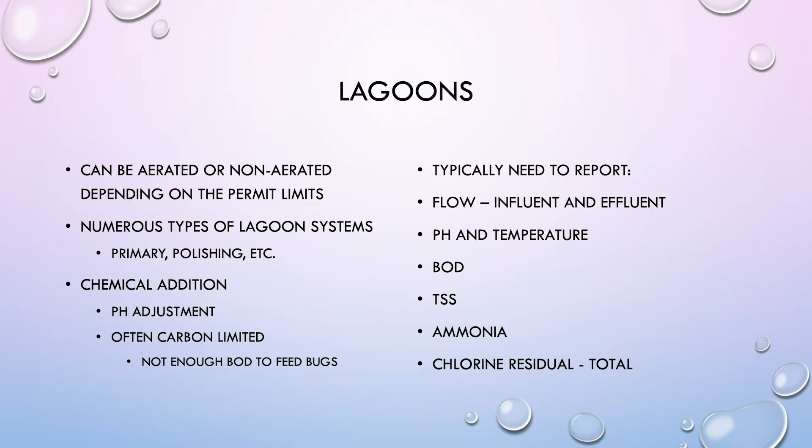Sewage flows from the collection system into the lagoon, usually BOD and TSS removal, right? We're going to aerate that sewage and let the TSS drop out. That's pretty much the basics of a lagoon. We've got algae, and the byproduct of photosynthesis is oxygen. Wind and rain produce that oxygen. Wind currents make waves, make DO. BOD removed by the oxygen, TSS removed by detention time. You guys are familiar with detention time because you're doing calculations in the lab, right? Bugs in the sludge reduce waste further.

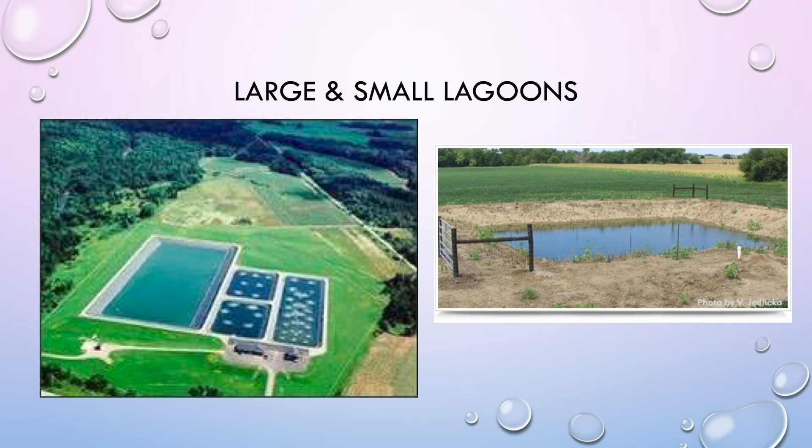Okay, we got little lagoons and big lagoons, right? So this is not my picture, but we have a lagoon in the state of Colorado that has a pre-treatment program that's very similar to the size of that. It's a campground that actually has a sewer line that runs to a manufacturer. So trying to do your local limits evaluation on that is rough. Big lagoons, that's South Dakota. That's a plant in Aberdeen.

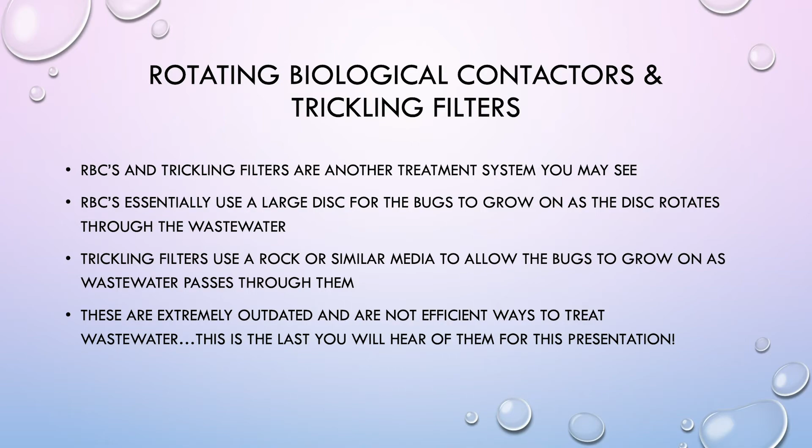Okay, rotating biological contactors and trickling filters, super old school technology. Has anybody ever heard of a rotating biological contactor? How do they work? It's kind of like a trickling filter on a stick. Trickling filter on a stick, like a jalapeno on a stick. Right. Big ass wheel with media on the side of it, goes into the sewage, comes back out into the air, the bugs create a slime on it, you get some reduction of ammonia and nitrate. RBCs are old. We don't really use them anymore.

Is anybody from Longmont? Nope. Longmont has RBCs in the back room of their plant. They don't work anymore, but they're there for historical knowledge, I guess, but they're huge. They've got to be 15 foot tall, 20 foot diameter. They're just huge. And back in the day, that's what the city of Longmont used for wastewater treatment. That was their pre-treatment program. So at that time, they just wanted to nitrify.

Anybody know what nitrify means? No. Whoa, whoa, whoa. Nitrify, denitrify. Some of you know what I'm talking about. Some of you don't. I'm not busting chops, but raise your hand if you don't know what I'm talking about when I say nitrification.

Okay, a couple of you.

All right, so nitrification, denitrification, that's the basics of wastewater treatment. We'll get into it. So rotating biological contactors, the big disc that runs through the sewage. Trickling filters, basically think about a silo. I'm from back east, so everything's a silo. Big round tank full of rocks. And you spray sewage on the top of it. The sewage trickles through the rocks.

And who's ever been in a septic tank? You feel that slimy stuff on the side of the septic tank? That's your biology. That's your bugs. That's your stuff that's doing the work. All that stuff grows on these rocks. And as you trickle wastewater across the top of this tank full of rocks, as it runs through the rocks, the bugs are absorbing and eating certain food. Ammonia, nitrate, things of that nature. By the time it gets to the bottom, it's fairly clean water. It's a little bit better than a lagoon for treatment, but still super basic.

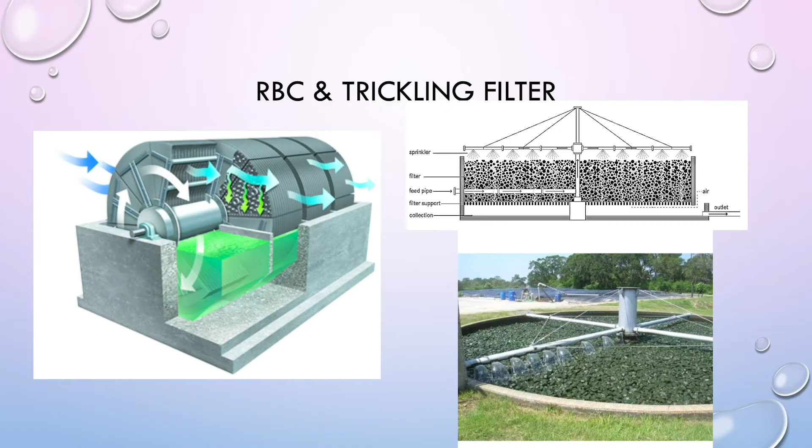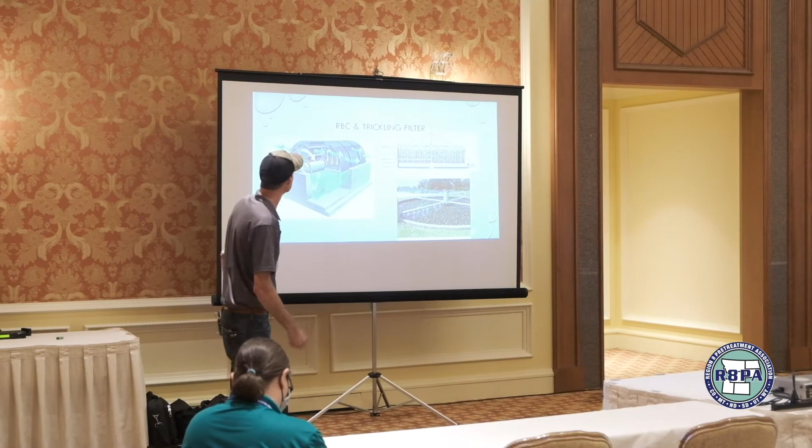So RBC, a couple of pictures here. If you can imagine the flow, the sewage runs through this big biological contactor, so basically a giant disc, cloth kind of feeling material. It runs really, really slow, like half a revolution per minute. Goes into the sewage, comes back out, there's a fan and air is blown across this thing for that nitrification, denitrification. Trickling filters, again, same thing, just a big tank full of rocks, the sewage sprays on the top of it, what comes out the bottom is somewhat cleaner water. Okay, that's the last thing you'll hear me talk about RBCs and trickling filters because we don't really use them anymore.

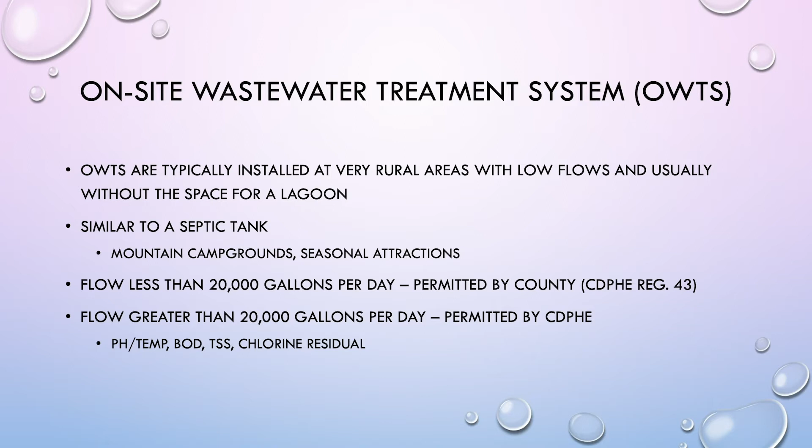On-site wastewater treatment plants. Anybody ever heard of it? I'm literally talking about a glorified septic tank. That's all it is. Very seasonal systems, campgrounds, they use these type of systems. So OWTS, on-site wastewater treatment. There's my acronym of the day. Rural areas, really low flows. Similar to a septic tank, mountain campground, seasonal attractions. Royal Gorge used to have one of these. I'm sure you guys have all heard of the Royal Gorge, highest suspension bridge in North America.

Maybe. Come on! All right. What? Oh man, you're talking my stuff now. We'll get into package plants. So let's just skip ahead here.

So flow less than 20,000 gallons per day usually, and permitted. I'm from Colorado, so you'll see a lot of stuff about Colorado. CDPHE is Colorado Department of Public Health and Environment. They're the ones that give our permits out. So these on-site wastewater plants, they're usually regulated on pH, temp, BOD, TSS, and chlorine residual.

So if you think about a lagoon or an RBC or anything like that, really small, campground type setting or a rural seasonal attraction, Buffalo Bill Museum, stuff like that, they're going to get these huge influx of flow, right? But somehow I've got to get my pH right all the time, I've got to drop some BOD and TSS, and then I've got to disinfect, so I've got to have a good chlorine residual. Very, very basic.

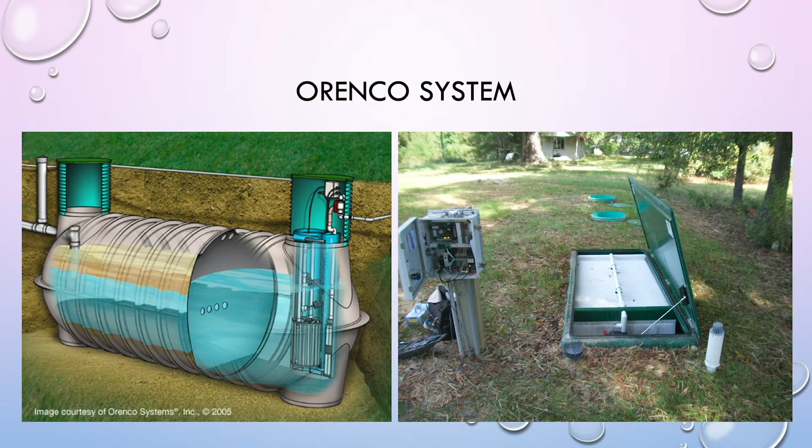This is an Orenco system. These are pretty common here in Colorado, so if you can imagine this house here, that's part of a campground, all the flow comes into this box, and inside this box we've got basically a grease interceptor, right? So the flow comes in, it's aerated, it's got these holes in the front of it, basically it only lets so much water through at a time, a little bit of a filter issue here, and then it gets pumped out into the receiving stream. Very, very, very basic.

Okay, now that we're done with the boring stuff, activated sludge. Who has heard the term activated sludge? Thank God. I don't know how many times I've walked in there like, you mean mixed liquor? I'm like, yes. So, activated sludge, this is the bugs. This is the biomass. This is the magic. So what is activated sludge? Substance used for removing pollutants from wastewater by a biological reaction that involves oxygen. The activated sludge is then separated from the treated wastewater and disposed of or returned to the process as needed.

That's from a book. What does that mean to you guys? For you folks that have never worked in a plant, what does that mean to you? Come on. Nothing, right? Doesn't mean anything. It means there's something going on. We're calling it activated sludge. It removes the pollutants from the biological reaction, and somehow there's oxygen involved. And then we take that activated sludge, we move it around the plant apparently, get rid of some of it, and we return some of it. Are you guys confused? Because I'm confused. That doesn't make any freaking sense whatsoever, unless you've been in a plant. So, pre-treatment folks, never been in a plant.

This is kind of cumbersome, right? It's like, what the hell is this guy talking about? Why is he at a pre-treatment conference talking about shit? Nobody cares. We always have to care, because if you're pre-treatment, you control the pollutants at the source, correct? You kill my bugs at the plant, we got problems. I'm coming to the pre-treatment office, knocking on the door. Hey, which one of you suckers let them dump a whole bunch of perc down the drain? Where's perc come from?

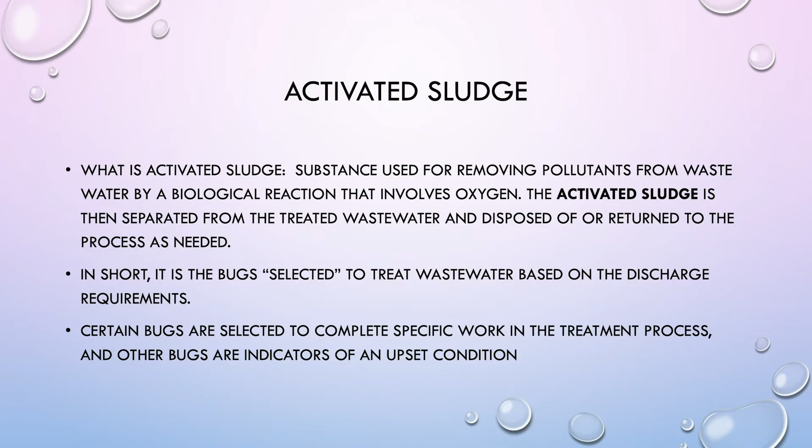Yes. All right. So my whole life in the plant side is making sure my bugs are happy. In the pre-treatment world, we're trying to make sure the industrial users aren't going to mess up my bugs, right? Anybody ever thought about it that way? Because most pre-treatment folks I talk to, they're like, I got to protect the clean water in the river that we discharge to. Well, there's a giant multi-million-dollar piece of equipment in the middle between where your work ends and the river. So if we screw up that environment, we kind of screwed up the entire environment, right?

In short, bugs are selected to treat wastewater based on the discharge requirements. So what that means, I don't know where a lot of you guys are from, because there's a lot of new faces here. Noah's from Box Elder Sanitation. I know Noah well. I used to work at Box Elder. I was a pre-treatment coordinator there. So at Noah's plant, at Box Elder, it's a complete biological nutrient removal process with no chemical addition. We have a little bit of industrial use in our service area. I have to select the bugs in my treatment plant to specifically do the work that is required for my permit with an industrial user contribution.

So I don't know if any of you guys have a BNR permit. We'll get into that in a little bit. But biological nutrient removal basically means you're putting out water from a wastewater plant that's probably going to go into somebody's drinking water plant. So if I didn't create an environment for my bugs to thrive to do certain work for Box Elder's plant correctly, they're not going to work to treat the waste. Now, can I take the Box Elder bugs and put them in Colorado Springs Utilities and they'll do the same work? Absolutely not.

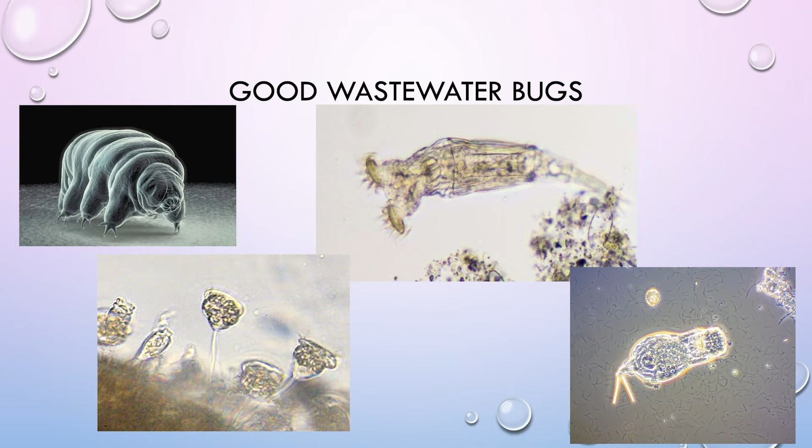Okay. So we've got good bugs and bad bugs. For example, does anybody know what this guy is? Water bear. What is a water bear an indicator of? High quality water, why? Well, because low TSS, great BOD, they're top of the food chain. How long does it take for a water bear to grow? I'm not sure. I think 30 days. Anybody know how long it takes a water bear to grow? Somebody said something. 9 days. Is it 90? 9 days.

To go from a bacteria to that guy. And when you look under a microscope, that dude is literally looking like a bear, cruising around. Sometimes you can hold up the slide and see him. So water bears are good bugs because it takes them 9 days. Does anybody know what MCRT is? Mean cell residence time.

Anybody not know what MCRT is? Don't be shy, it's all right. MCRT is mean cell residence time. How long is the bug in the system? How long is the bug floating around in my wastewater treatment plant?

Okay, somebody that knows what MCRT is. Somebody. What's your MCRT of your plant? Right now, probably hovering around 5.5. 5.5. 5.5 days for a bug to be in his plant. Okay? It takes 9 days for that guy to grow. So what happens if I throw a weird slug load at that plant?

That guy never grows. His MCRT is 5 days. That guy's barely making it to survive. You throw a weird slug load at it, that guy's dead immediately. Bacteria to dead, like that. So, we were talking, go ahead.

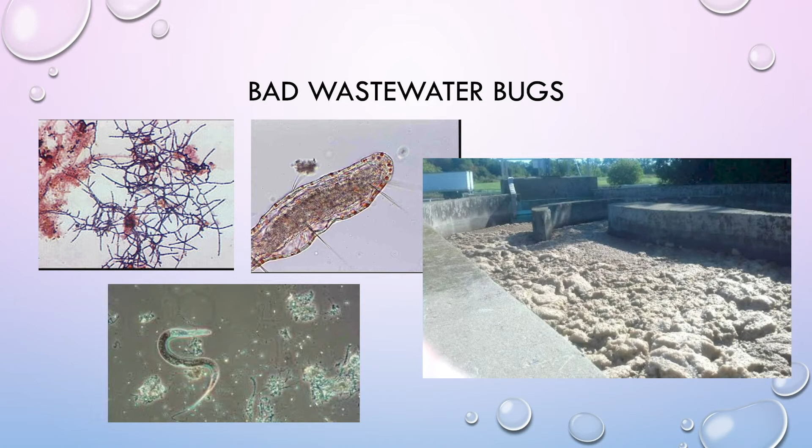Some people put chlorine in the system to try to kill them off, but I call that nuking them, because I don't know about you guys, but I don't know how to calculate the demand of waste-activated sludge running through a pipe at 200 gallons a minute. You kind of just drip it in there and hope for the best. Sometimes you kill the Nocardia, sometimes you kill the whole damn plant. So I'm not a fan of that.

But with Nocardia, the best thing to do to get rid of them is just figure out your process, figure out what's coming into your plant. And that's where you got to go. The plant operator guy has to go over to the pre-treatment folks and go, you guys see anything weird? I can't get my DO above 0.5. Now, as pre-treatment folks, you should be able to say, we've seen this happen, we've seen that happen, we noticed an odor this day, right? You got to work together.

Your collections guys, those guys are in the manholes. Kevin used to work in the collections department. Noah is in charge of the collections department. When I was working at Box Elder, how many times do you think he called me and said, dude, there's something stinky in this manhole? All the time. Something's weird. It doesn't smell like a manhole. Or we saw a weird color. That's how your pre-treatment folks should interact with your collections people. Your collections people are your first line of defense, right?

Your industrial users, you've permitted an industrial user. They had an illicit discharge. How long does it usually take them to get a hold of you? Within 24 hours, right? When they figure it out. Who's the first one to know something's wrong? What's that? Plant and collections. How many lift stations do you guys run? We all have a lift station, right?

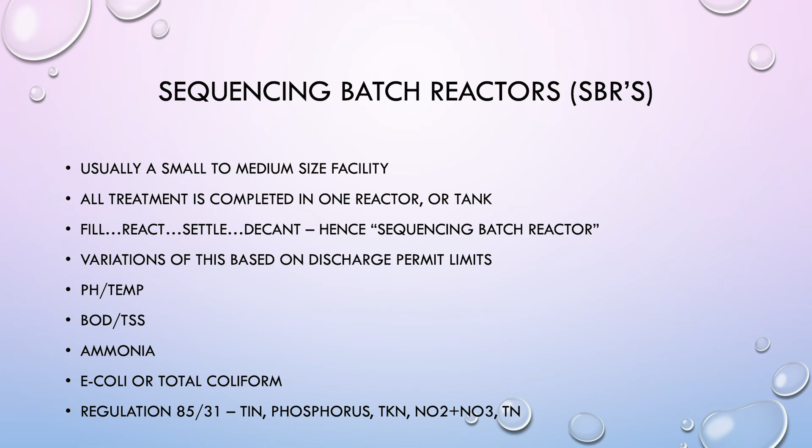But every permit's gonna have pH and temp, BOD, and ammonia, and E. coli or total coliform. In Colorado, we have Regulation 85 and 31. Total inorganic nitrogen, phosphorus, TKN, nitrate, nitrite. And total nitrogen. Couldn't see it behind the bubble. Anybody have to deal with that right now? If you're from Colorado, you should all be raising your hand.

Anybody from not Colorado have these problems? Utah, are you guys on board yet? Are you on board with nutrient limits yet? Are you? Okay, because South Dakota is not even close. I'm going to Aberdeen tomorrow or Sunday. From Aberdeen to Pierre, and these guys are like, we nitrify it like hell. I'm like, yeah, but your freaking phosphorus is 50. Okay. So, SBRs are really, really good at removing these nutrients. We'll get into that here in a little bit.

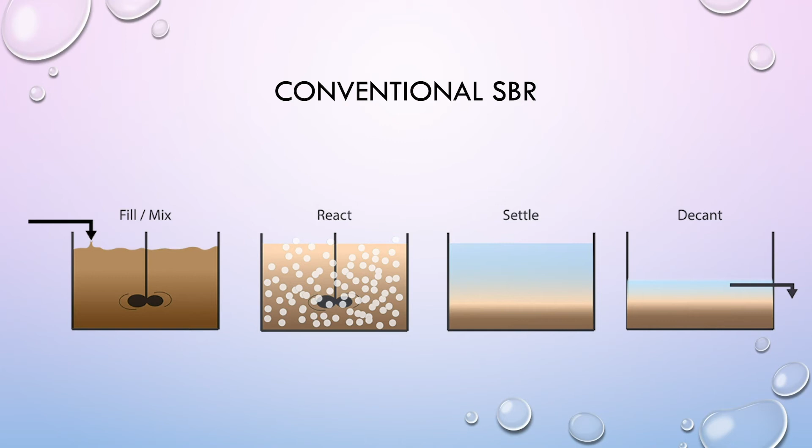Somehow I'll get pretreatment in here. Why do we care? One tank. That's where the bugs live. Now, if you get a high load of zinc or a high load of chromium, right? One of your industrial dischargers dumps something down the drain. I have one tank, right? So I'm fill, react, settle, decant. What's the common denominator here? Bugs. The bugs didn't change. It's the same bugs.

So if you don't have a decent pretreatment program and you fill up an SBR full of a high strength load, you killed the bugs, still dead. Following me? It's a big deal with an SBR. In a conventional plant with numerous tanks, you might kill one tank, but you got another tank that'll survive. In an SBR, you kill one tank, you're dead in the water, right? Pretreatment's very, very important for an SBR.

And I said it's from 0.5 to 1 MGD, right? Probably not gonna have too much pretreatment worries. Probably not gonna have too much industrial contribution. How many people have an industrial user that has an SBR? There we go. Your slaughterhouses, I don't know if Adam talked about it yesterday or not, but I have 4 slaughterhouses that have their own SBR process that they discharge to the POTW. So, pretty cool stuff, right? Is it all coming together?

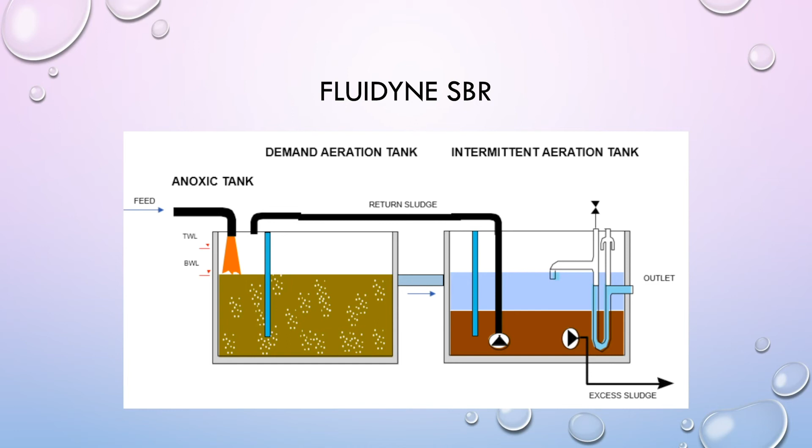All right. Fluidyne SBR, junk. This was the cat's meow in like the early 90s. Basically, it's over-engineered. It fills, this is the baffle wall. So you got your sewage coming in, hits this baffle wall so it can't go into your reactor. And then flows under like a grease trap, gets aerated, treatment happens, flows into this other tank, settles out the sludge, clear water goes out. This return sludge gets sent back over for those bugs to continue doing work.

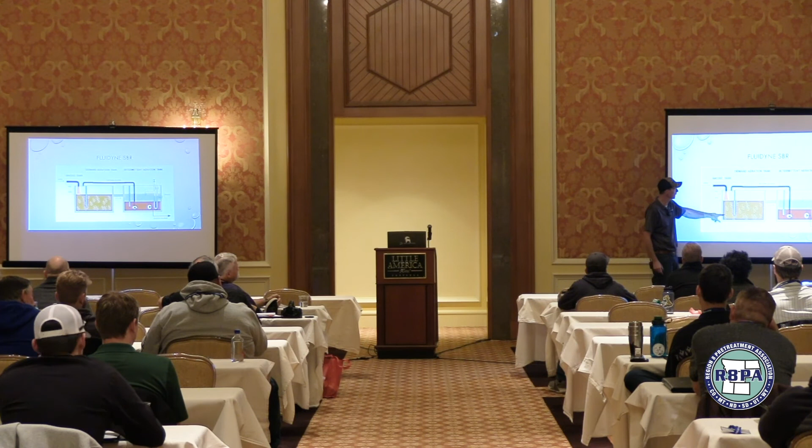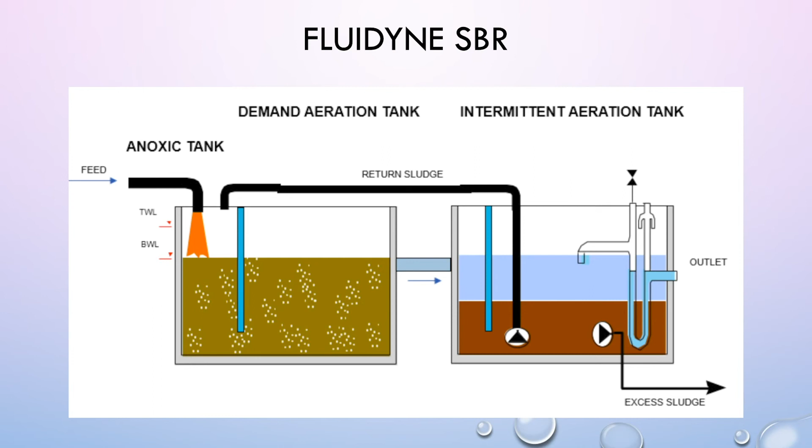Problem is, this is also the waste line. So if I need to get rid of bugs, it ends up in here. So what happens with a grease trap, if you're filling up your primary tank and your grease trap, what happens to the secondary? All that crap ends up in the second one, right? So same thing in this plant. You waste all the bugs you don't want into the same tank that the food's coming in. So all that stuff ends up sloughing through your plant. So that was really the cool thing back in the 90s.

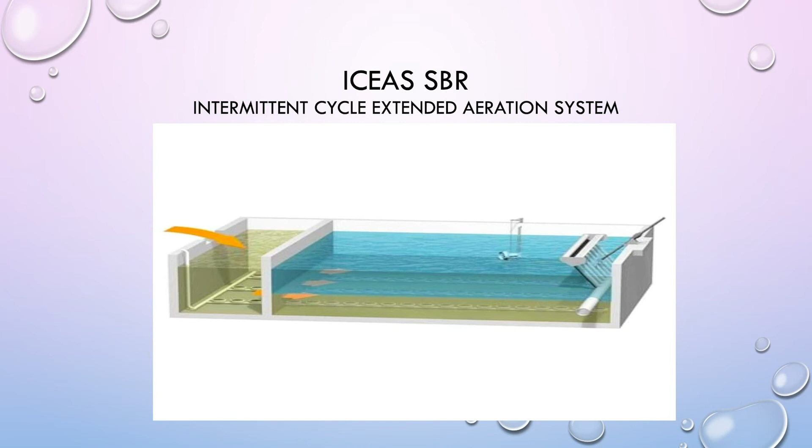Fast forward to 2010, ICEAS. I am proud to say that every ICEAS in North America I have touched. Every single one of them. I am the startup guy for Xylem on ICEAS SBRs. I went to Belgium 2 years ago to start up the very first ICEAS SBR. The cool thing about an ICEAS, intermittent cycle extended aeration system, is basically the food comes into a separate chamber, all by itself. There's windows down here. So hydraulically, that's what pushes through.

When we get into BNR, basically biological nutrient removal, you need a spot for anoxic conditions. Anoxic means what? Come on! No oxygen, but a presence of what? Low, slight presence. Well, now we don't even know what we're talking about. Technical term for anoxic is absence of oxygen, presence of nitrate. Now, you guys are both correct, because you said very low oxygen, but what is nitrate? NO3. So is that an oxygen form?

Absolutely. Now, if I'm a bug floating around in the old wastewater treatment plant and there's no oxygen, but I'm hungry, what am I going to eat? Nitrate. Why? Because I can literally bump into it and have it go through my cell wall and I'm full, right? So with the ICEAS, we make that SBR process very small scale, small flows. We have a spot to where we can start treatment before it even gets into the reactor. The reactor portion is basically the same as the other SBRs. It fills and decants and does its whole thing. Any questions on an ICEAS? Pretty cool technology. They're all over the place now.

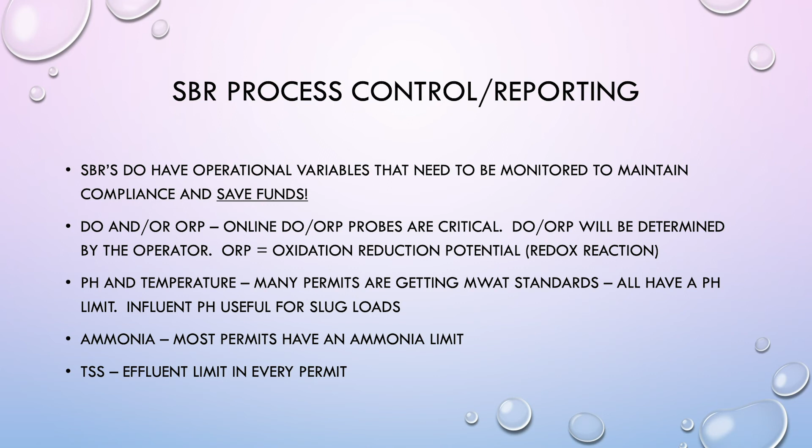Told you. So DO and ORP. Anybody ever heard of ORP?

Okay, so the cool thing about being a consultant is I get to work on both sides of the fence now. Back in the day, it was plant, pretreatment. Now I do plant, pretreatment, and industrial users. Hence the name of my business, Direct Discharge Consultant. Everybody thinks that's the goofiest name possible until I run into a pretreatment guy and they're like, pretty cool name. Because they get it, right? There's indirect dischargers and direct dischargers. I focus on the direct discharge, straight to the river, straight to the receiving stream.

But the cool thing about being a consultant on what we do is that I get to work on the industrial users as well. Because they're like, man, Box Elder's permits are hanging me out to dry, saying I can only discharge half a part per million zinc. But I do a metal fab. I got to have all sorts of zinc. I'm in 433 categorical. Okay, how do we make this better? What kind of pretreatment can we do in your plant or in your system to make sure that you can meet Box Elder's limit? That's super fun, right?

Kind of cool. DO and ORP, the reason I bring up ORP is because a lot of my industrial users that I consult for to meet district or city municipal pretreatment programs, we're using ORP, putting in online analyzers for ORP because it's a much finer, minute concentration, if you will, of DO. Because DO, right, everybody talks about DO. You got to run your DO to 2. In your aeration basin, it's got to be 2. To nitrify, you got to have 2.

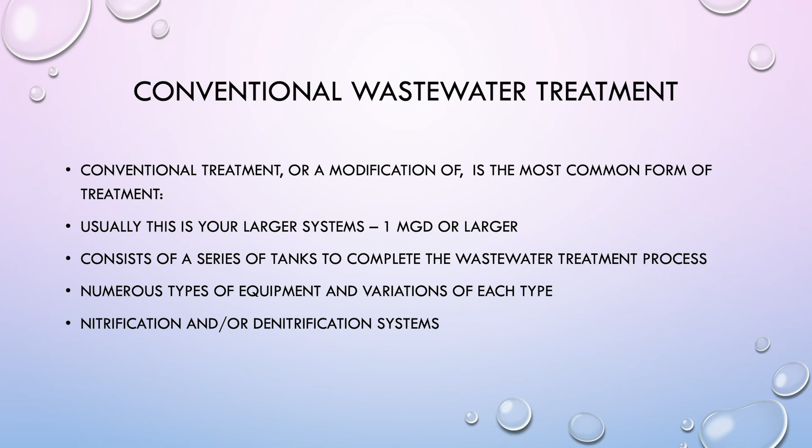I kind of just said 1 MGD or larger. That's not 100% accurate. Some SBRs are bigger than 1 MGD. Consists of a series of tanks to complete the treatment process, equipment and variations of all these things. Like if you go to Colorado Springs, it looks different than Box Elder. If you go to Cheyenne, it looks different than Fort Collins. They're all doing the same work, right? And then we finally get into nitrification and denite. Some of you, this is going to be boring, but some of you, it might kind of get the wheels spinning a little bit about your pretreatment program.

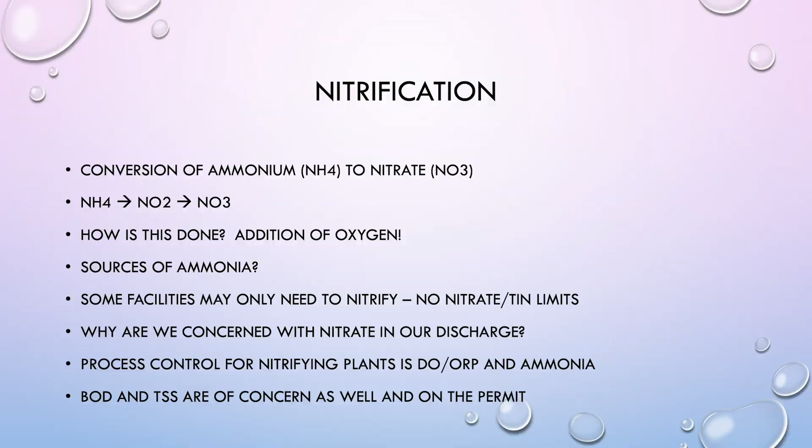Okay, to nitrify, conversion of ammonium, NH4, to nitrate. Everybody got that? Everybody heard of the nitrogen cycle? Ammonia, nitrite, nitrate, gas. Everybody's heard that, right? If you have not, call me. I will talk to you for hours on end until you hang up. Now, what's the difference between ammonium and ammonia? What's that? One of them's in solution. Bingo. Okay, so NH4.

Now, when we talk about sewage or wastewater coming to a treatment plant, are we talking about ammonium or ammonia? So I've got ammonium. Did anybody say ammonia? Who's saying ammonia? Where are you from? Evanston. What's that? Evanston. Hell yeah. Why does he say ammonia and these guys are saying ammonium? There's one in Wyoming. What's that? There's one in Wyoming. I'm good with it.

Now, we said it's in solution, right? Yeah, but ammonia doesn't stay in, it's a gas, right? Well, how do you convert ammonium to ammonia? Well, you have to strip off that hydrogen. How do you do that? Probably by adding oxygen to it. How do we do that in a pipe? Who's been in a sewer line? Who's been in a manhole? Turbulence in a manhole. That's enough to convert ammonium to ammonia.

So in the wastewater world, we talk about ammonia as nitrogen. Literally that volume of water cruising through a 12-inch pipe, getting necked down to an 8-inch and then back into a 24. That amount of turbulence converts. Pretty cool, huh? All right, so how do we nitrify? We take our ammonium, usually ammonia, and we convert it to nitrite and then to nitrate. How do we do that?